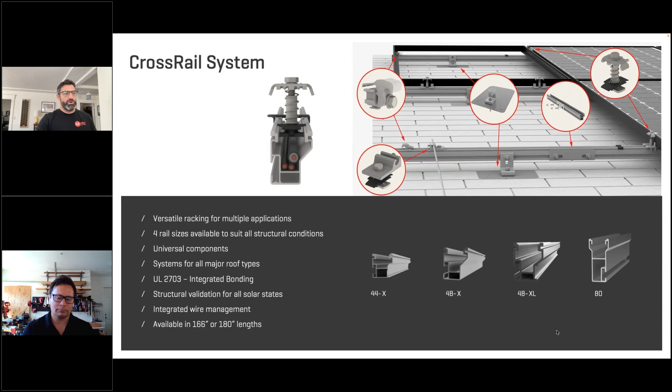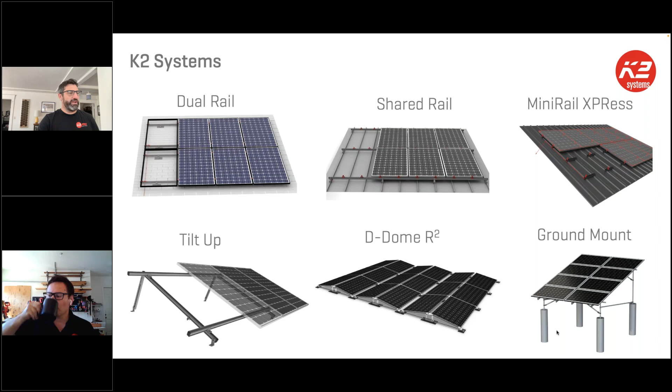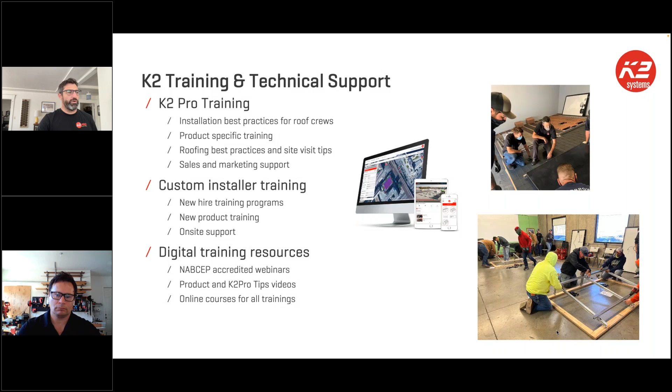These products are in the base design tool, so you can look at different systems with the Crossrail system, as far as dual rail, shared rail, tilt-up systems, our roof attachments that Nick will show you, and how you can select them in the base tool. He'll just be doing an overview, and we do offer additional training and support for that, so feel free to get in touch with us.

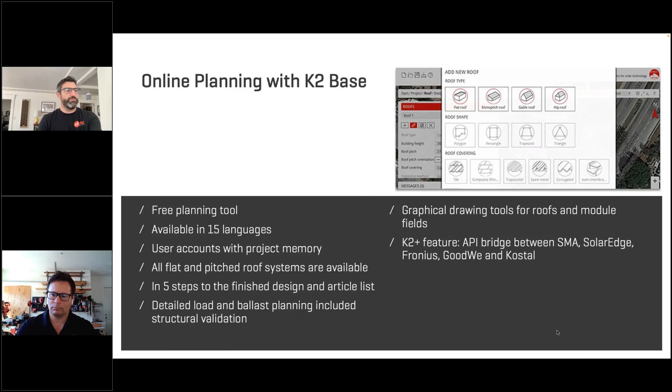But the design tool is what we're going to be focusing on, and I'll hand it over to Nick so he can show you how those products like the Crossrail and our roof attachments are incorporated. Let me pass that over to Nick now, and he'll give you a rundown on the base design tool. And I'll stick around for questions.

Yeah, go ahead, Nick. Excellent. Thanks for giving us a background on K2. Welcome everybody. Today we're going to be driving over our base design tool. So K2, we like to offer you a ton of support and service for your projects.

You guys can see my screen now, yes? I think so. So I'm right here at the K2 site. Let me move this on over. There we go. So I'm on our website right here. There's two ways that you can find our base design tool.

One is right at the top where there is a button that says K2 Base. And the other way to find it is over here where it says Service, and you go to the Base Online Design tool right here. You'll land on the splash page for Base. A lot of tips and tricks, helpful videos in here, background on exactly what the system does.

Basically, what we're trying to offer you here and help you succeed in your projects with is a configurator to help you get a bill of materials, analyze your system, and make sure that you guys are utilizing the equipment to the best yield, making sure that down to the last T-bolt, down to the last end clamp, mid clamp, you have accurate equipment layouts for your projects.

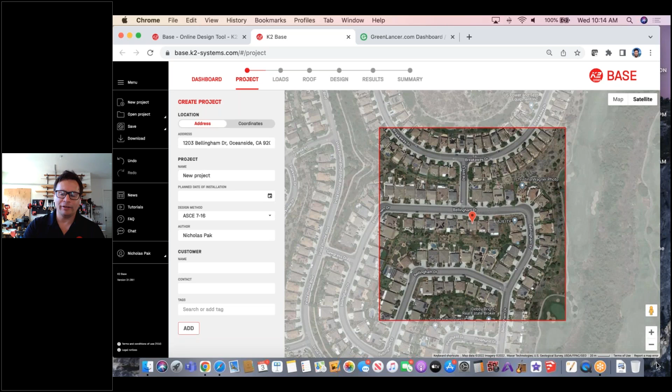So this is the homeowner's address. I'm going to zoom in a little bit further here. It looks like we got a nice flat tile roof on a little bit newer home, and all of the neighbors have solar except for this one. So everybody's reaping the benefits of return on investment by putting rooftop solar on their house, and this customer would like to do the same, and we're going to do it for them. So this is going to be the tile house Oceanside.

And that's the only thing you need for your project in this portion of the tab. As you can see, it's highlighted as project. You'll see these other ones that are not highlighted yet because the tool's not going to let us erroneously go through the tool without providing information about the project. For this project tab, all you have to do is have the address and then give the project a name.

There are other parameters here and other fields that you can opt in to fill out, and we'll go over those real quick. So, for instance, let's say this particular homeowner wants this installation completed by the end of September. So we'd say that this needs to be installed on their property and up and running, or at least the mechanical and installation part needs to be done by the 30th of September. This can help you stay organized on the dashboard as well, so you can organize all your projects.

We have our design method as ASCE 7-16. This is the current standard that is adopted across the United States in most jurisdictions, which basically explains what the actual cantilevers of the rail are, how many roof attachments should be placed upon the roof, and it basically has some of the engineering design methods that are applicable to most jurisdictions, ASCE 7-16. We can give you older figures as well, and if you are in Europe or if you're in Mexico, per your login, it'll actually basically concatenate to those or be organized in those factors for you.

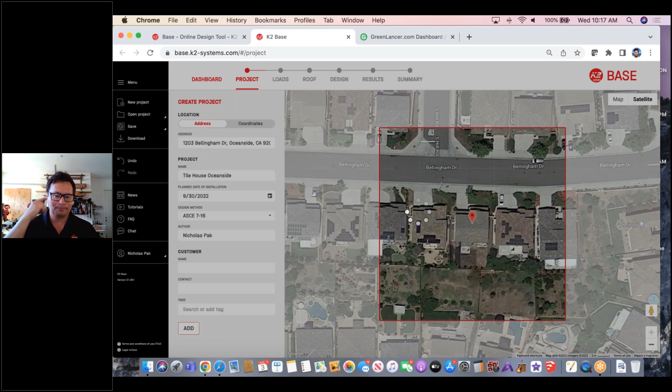It'll automatically go to the design method for you, and we're going to move from projects over to the loads of the area, which means wind loads and any kind of snow load in the area. It's Southern California, so it's going to pull that information from the address, and any historical weather information will come up. My internet service is a little slow sometimes when using the camera, so just give it a second to catch up.

So what it's doing right now is showing there's no wind or snow load in the area. You can see there's 0 PSF of snow in Oceanside. I don't know the last time it snowed down in San Diego, probably way before our time. Anyhow, the only thing you need to do in this loads portion is note that it's already pulling historical weather information from this zip code.

The only thing you need to tell this project is what type of wind exposure this is, because it's a pretty broad area of Oceanside and we don't know if it's coastal or inland. So we're going to click on this menu. Is it an urban setting? Is it open terrain, open waterway, like by a lake or by the ocean? This one is a little more inland, so we're going to go ahead and use wind exposure category B.

We're basically just telling the software that we don't need to double up on roof attachments or anything because the wind exposure isn't that strong. As you can see here, maximum historical information tells us it's basically 96 miles per hour, which is still high, just letting you know it's not nearly as wild as it is down in the coastal areas.

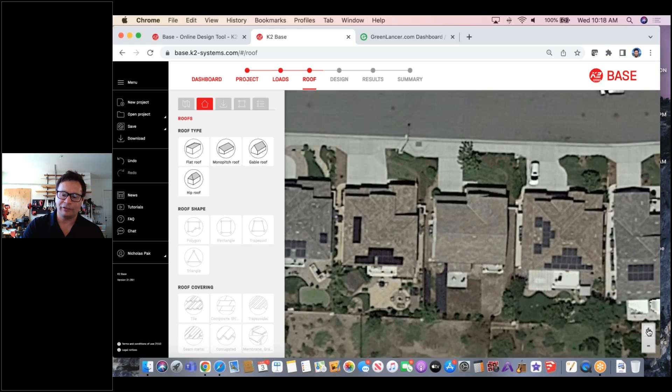That's all the information that needs to be inputted into this part, and it'll take us to the roof portion of the configurator. Now that we know which house it is, we can zoom in a little tighter on this house and get an idea of where we're going to design on this roof. This is actually a terrific roof to design on because it's a very good rectangle, and I think we have terrific exposure, so we're going to get great production out of this roof.

Now it's going to ask us some architectural information about the house. What type of roof are we actually designing on today? Well, we're designing on a gabled roof today, but we do have options for flat, mono pitch, and hipped roofs as well. Since we are only going to be designing on the south side of this house, we're going to be choosing gabled.

Gabled tells us that the common roof shapes for gabled are rectangles or squares, and it's going to automatically choose that for you. It's also going to give you the options of different roof coverings. We have tile, which it is, but we also have comp shingle, trapezoid metal, sheet metal, or standing seam metal, and we have membrane and gravel materials, which are more applicable for flat roofs.

So I'm going to go ahead and click tile, and this is going to go great with our cross-rail system. It's going to go even better with some of the new tile hooks we've brought to the market, really enhancing the install practice of putting in tile hooks. We have new tile hooks that have a built-in water barrier on the bottom of butyl—super speedy, super safe to install.

You can title the roof anything you wish here. You don't have to—it's just going to call it roof number 1. If we added more roofs, it would automatically calculate which roof it is, roof 1, 2, 3, 4, as we go along. But if you want to put any information here, like south, or how about let's put backyard.

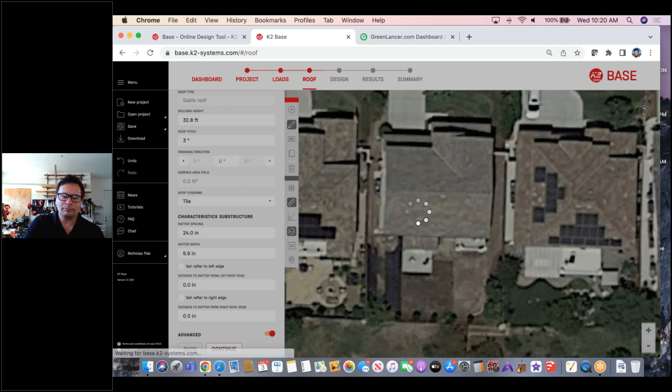Now what I've done is I've established the roof zone. This is where all of the solar is going to go on the house. We could put multiple arrays inside of this roof zone, or we could just put one broad array across it. We do need to make sure that the pitch is accurate with the actual house.

When we did our on-site visit, it was about a 26-degree pitch. From this portion of the roofing page, we know that the roof is a tile roof. We can change any kind of rafter spacing if we know that maybe this particular house had 16-inch on center. Normally on the West Coast, especially in California, you're most commonly going to see 24-inch on center right there.

After that, we're on our way to finishing the roof portion of that, and we're going to go ahead and click continue. And that's going to take us to the last portion of this.

If there's any other exposures to the roof, like if you know of any other snow load in the area—like I said, it's oceanside, we don't have any of that—so we're going to keep on driving.

Let me just check how I'm doing for time here. Got a couple more minutes left, so I got to get over to the results tab. Going to click continue from here.

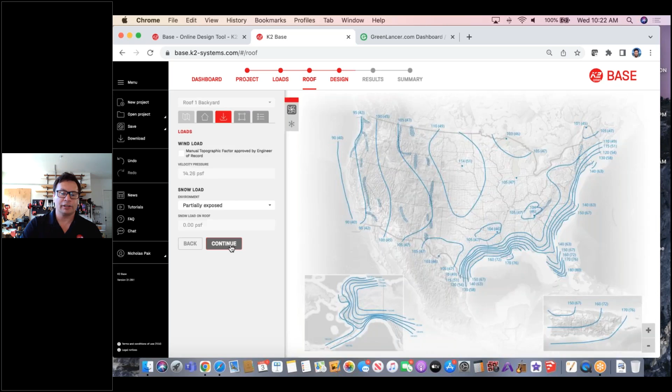If there's any outstanding obstructions like large pipe vents, anything like that, chimney maybe over to the left, you can classify it here in the obstructions. There's nothing on this particular roof, so we're just going to keep on driving, click continue, and it's going to take us to the design portion where we select modules.

So here is your module landing page. We have a fully packed module library. You can pick from any modules that you've ever seen on the market out there in this vast library that we have—hundreds of modules in there.

But the one thing that we actually added to the tool that's very helpful is this filter here for you to put in modules that are only UL approved for our Crossrail system. So this will take all of those hundreds of modules and sync it down to dozens for you.

So I'm going to go ahead and select some Q CELLS modules that we were providing to this customer, the 400 watt series G10s. These are terrific modules. Modules are getting larger and larger these days, but performance is also being added with those larger modules as we get these bigger modules in the market. Going to go ahead and click continue here.

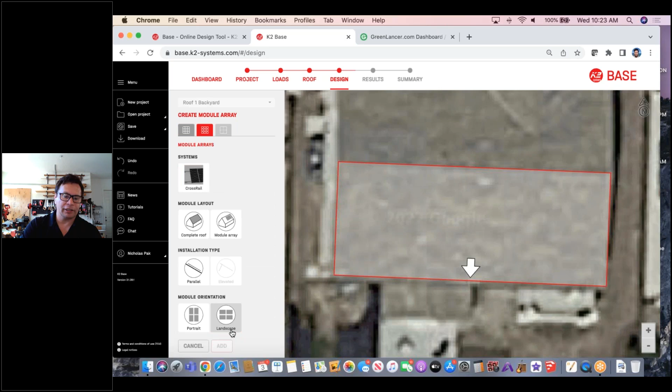It's going to ask me what type of system are we going to install onto this property, or onto this roof, excuse me. We're going to be installing the Crossrail system.

And it's going to ask me, would you like the tool to automatically fit the array for you, or would you like to draw the array yourself? That's the difference between module layout complete roof, where the system does it for you in the specified area, or module array, where you can draw it yourself.

I'm going to draw it myself. I'm going to tell it exactly where I would like to have this particular array. After that, we know that it's parallel, or what everybody considers a flush attach on the roof. And then we're going to be going for a portrait orientation.

I'm going to click add, and then you'll also notice once more my cursor will turn into a crosshair, and I'll be able to click on one side and drag the array across the roof. So there we go. We can fill in the entire area.

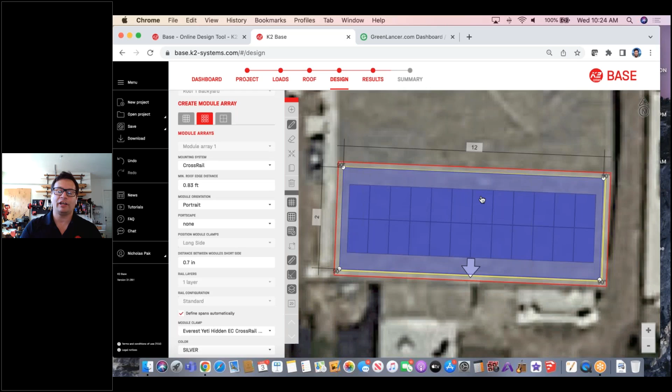So dimensionally, this is telling me that we can fit 2 by 12, 24 total modules on this roof, 9.6 kW array per our calculations. It's exactly what the customer asked for. We can even slim this down and position it a little bit more strategically on the roof here if we'd like.

We can get it centered as much as possible, and I can move it around. Let's say we wanted to make a unique type of geometry, like if there was a chimney in the middle of the roof and I wanted to get rid of one or two modules, I could click on this delete modules and restore modules button, and remove modules as needed. Or if there was an obstruction and I needed to remove a module, very simple and easy to do, but this is going to be a perfect rectangle.

We're going to be able to install this rapidly on the house. Customer is going to be happy, kilowatt target was met, and we're able to move on. I'm going to go ahead and click continue.

From there, calculation of the total modules on the roof. We have 9.6 kW, trying to get over to the results tab so we can import or export this over to GreenLancer and be conscious of everybody's time. I'm going to click continue.

It's analyzing the system here. You're getting a top-down view of how the actual install will be staggered across the roof. You can see the roof attachments have already automatically been staggered for you, giving you a top-down look of the rafters and the roof zones we've stipulated on the house. This is a taller two-story building, so we want to make sure we put the array towards the core of the actual roof, giving us a lot less uplift on the sides of the house with wind.

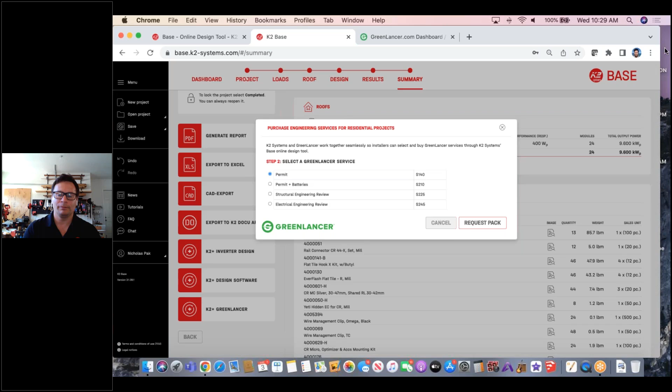Thank you, Nick. All right, just sent it over, David. All right, thank you, Nick. That was awesome. Thank you to everyone who's attending today.

So we are solar design and engineering made to order. I want to simplify this process as much as possible. GreenLancer was founded to accelerate adoption of solar energy throughout the United States and the rest of the world. Our mission is to make subcontracting solar permitted designs and engineering simple and fast for installers. No more dealing with emails, no more dealing with paper. Everything is held online, and we really accelerate that process.

How it works: GreenLancer is an online platform that allows solar installers to order permit designs, engineering services, and all other solar solutions from an on-demand network of providers, saving installers time and money. It's a pretty easy 4-step process. You create your account, which is totally free.

We don't ask for a monthly membership fee or anything like that. Once you have your account started, you can create a solar project, browse and order our fulfillment services. As soon as those services are completed, you'll be able to download those PDFs and take them to the permitting office or the local municipality. Why GreenLancer?

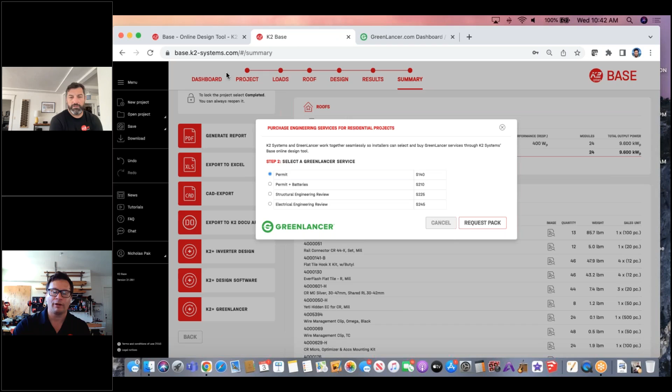Because when it comes to any kind of RSD accessories, let me go ahead here. Main screen, show screen. So yeah, the question was about rapid shutdown and selecting the right equipment, how do I find it. We don't have any API bridges with Tigo at this time. We have been talking to all of the RSD and rapid shutdown microinverter power optimizer companies. I'll go over really quick what's available in the K2 Plus inverter designer.

We do offer Fronius, GoodWe, Kostal, SMA, which does utilize Tigo optimization. We just hosted a webinar with Michael and Alfonso last week regarding the integration of Sunny Design. Sunny Design will assist you with Tigo accessories - I believe it's a drop-down menu in their Sunny Design configurator. This way you can select the type of grid you're connecting to, and the kind of equipment you're deploying with SMA, and there's a drop-down menu for Tigo optimization. As far as cable lengths, I don't know if it does that. It's definitely worth signing up for the SMA tool so you have access to more of their technology. I think you can find the correct cable lengths, but I'm not absolutely certain. But I'd definitely sign up for SMA Sunny Design because it does have a menu for Tigo optimization inside of that.

Johan did mention modifying a bill of materials - simple to do. So we're at the summary page, the same place we did the handoff to GreenLancer here. If I want to edit my bill of materials, I just click Edit BOM. I click on anything - let's say we want to send out a couple extra rails to that job site.

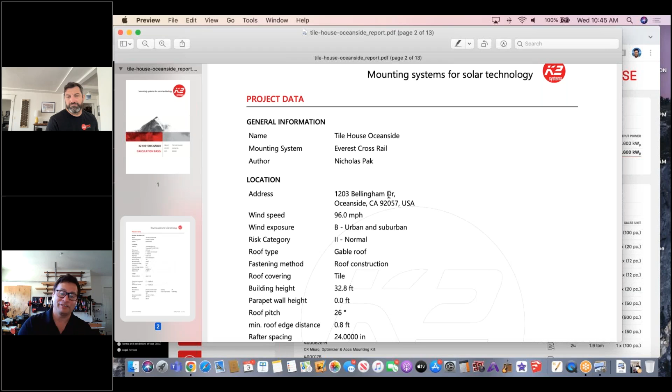We're highlighting GreenLancer as rapid permit support, making sure you get all of your information from them and they can assist you with getting permitting very quickly. In some jurisdictions, if there's one out there that does offer over-the-counter permits, I don't think they do anymore, David, but we tried to pack this permit package and report with everything you could possibly think of. So every question the AHJ would ask, total footprint of the system, line drawing of the system, loads on the actual array, everything should be in here.

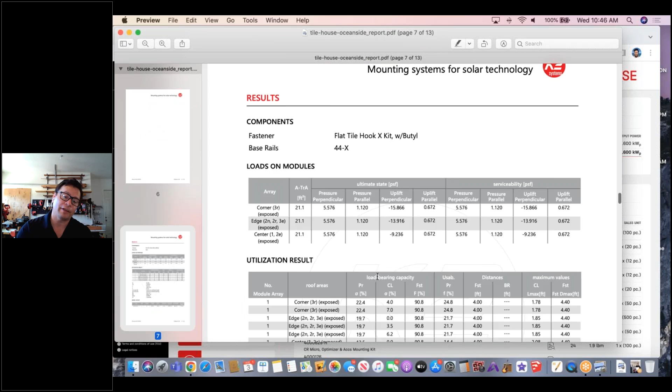The last page is your BOM, which you can send over to your distributor. So you can send that over to Krannich and they can help you out with this material.

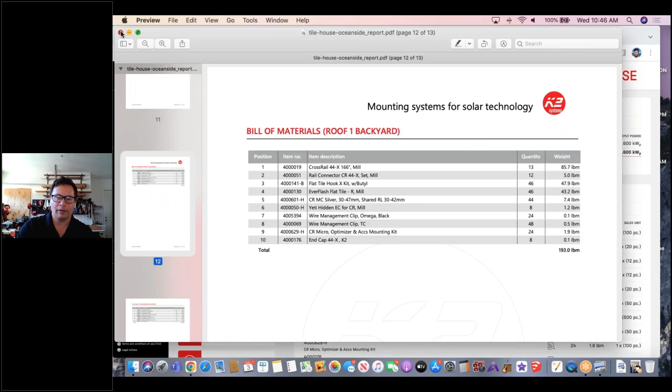Like I was saying, lots of tools built in here. You have the ability - a lot of people are fond of using AutoCAD or any kind of DWG drawers, even Google SketchUp. You can take this DWG here and throw that into Google SketchUp, and it'll take this exact line drawing, dimensionally, and provide it for you in a digital workstation file. So, a lot of features packed into this system, multiple different roofs.

Was there one more question? Sorry, I can keep going on and on. Sorry.

Yeah, I think they were just clarifying that it was about the rapid shutdown module, like best placement for the module when you have a dense layout and where to put the modules for the best cabling.

That is... I don't want to make an assumption on that. I'd have to ask that particular module manufacturer where that would go. I'm going to take a shot in the dark here, and I'd say most likely at your wire transition or your home run, like towards the end of the array. So if you were to start at the beginning of your circuit, I think you would put it at the end of your circuit. But that's a little outside my wheelhouse for the placement of the actual RSD module by itself.

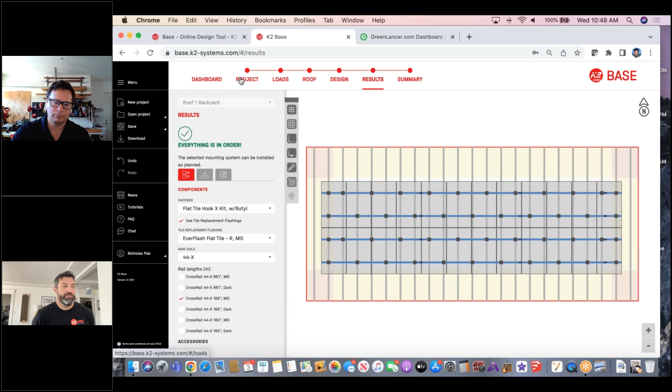I'm a little bit more fond of placement of microinverters and placement of power optimizers, which also perform RSD, specifically SolarEdge ones. So, I think it depends on the layout of the array. If you've got a perfect square, or some offset module rows, it's going to change the way it goes.

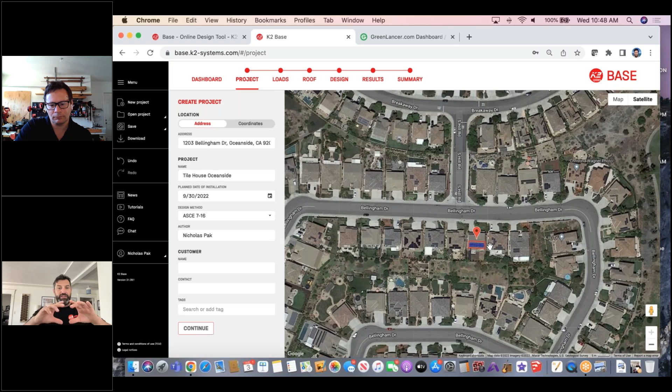I haven't played with those yet, but similarly to SolarEdge, if you have that on the rail or the module, there's definitely a distance, and usually I repeat that distance and measure it out so that your wire connection isn't drooping too much or extending too far - you're not pulling too hard on the wire. So it's kind of a tricky thing, but it's more about playing with it on the roof and seeing how you can best maximize the extension of the wire without pulling on it too tight.

I'd have to get the modules in our training room and try to play with it, or just be on a job site. I was looking at the additional questions from Douglas.

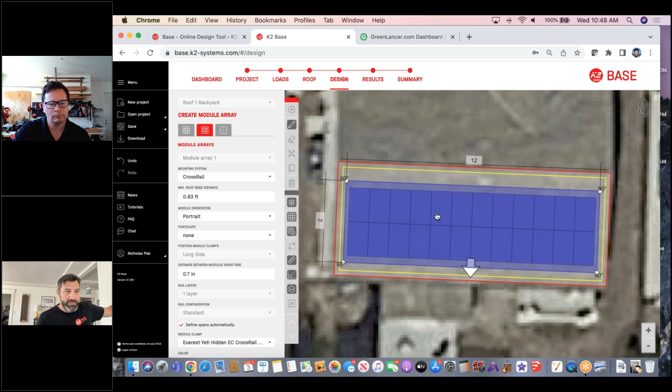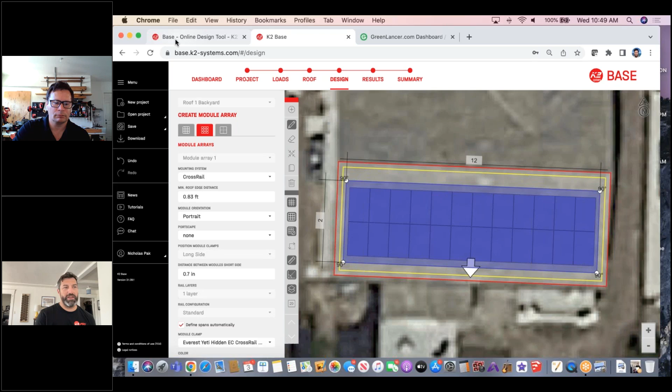Oh, best cabling - yeah, wire management's a tricky one. There's no one answer, I'd have to just play with them on the job site. There's usually one wire management expert on a crew who takes it on, but I don't have one solid answer for that. If I do come up with it, we'll definitely make a video out of it - it's not a bad idea. We have some videos on wire management already.